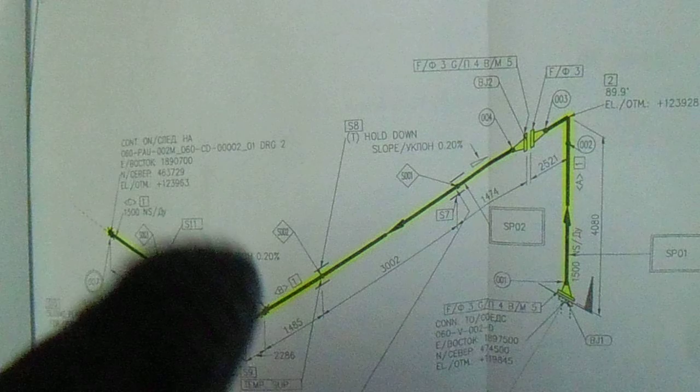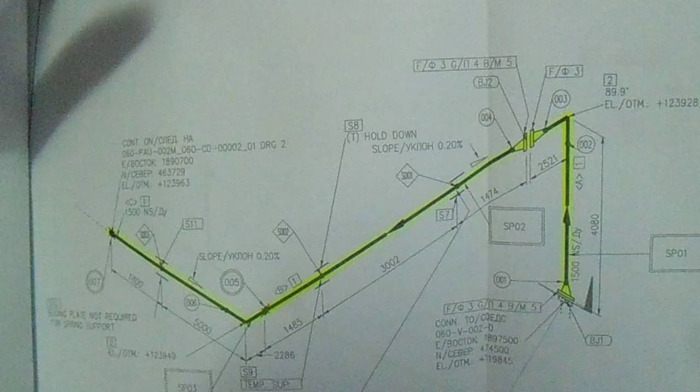So this video is regarding the test diagram legend, okay? This test diagram legend is attached in the test package. We have the isometric here, and here we will see the symbols for the test legend. So this is the test legend. So what is TM, LP, PI, FP, DP, PZV and TB? What is the meaning of all that?

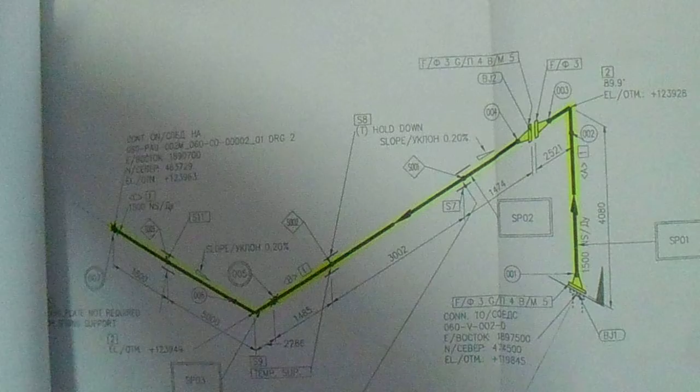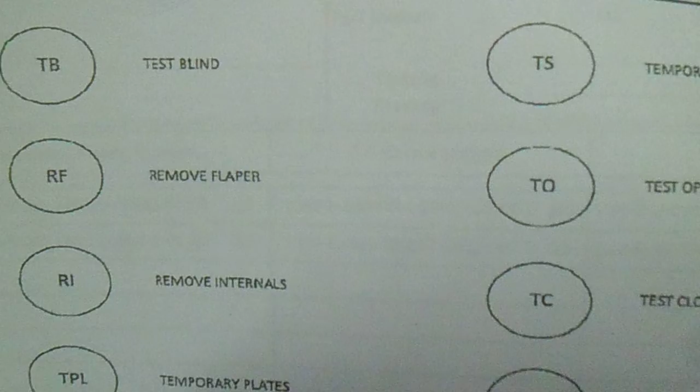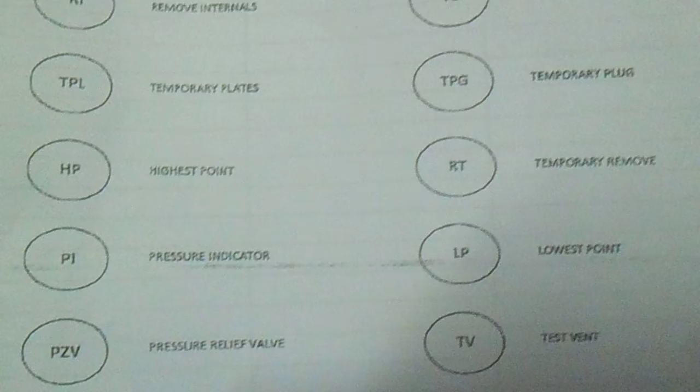So to know that, we will go to that test diagram legend. So what is LP? This is the test diagram legend. So from the isometric, they have LP, PI, FP. So what is LP? LP here is lowest point. So this is LP, meaning lowest point. So lowest point meaning they have here, from the isometric.

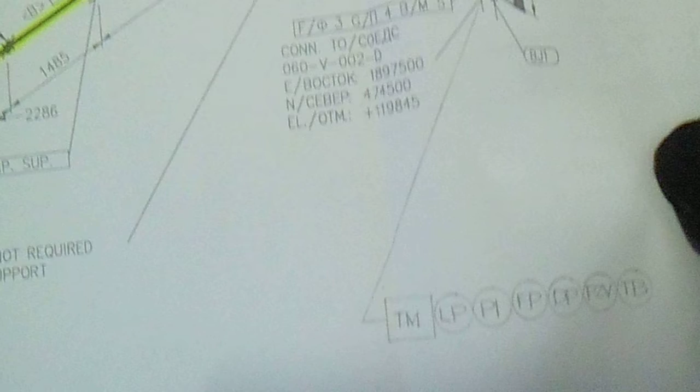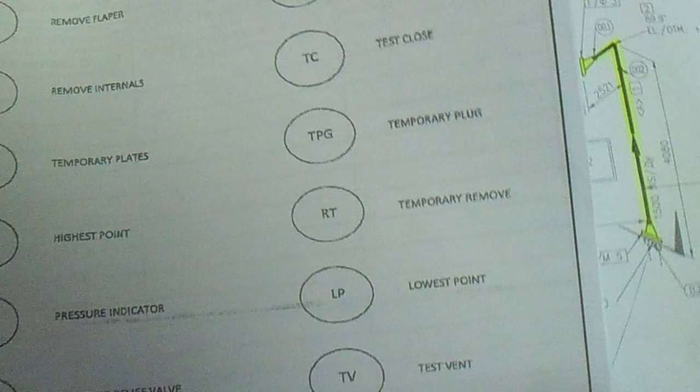Here is the test manifold, so that we have TM, because the meaning of TM is test manifold. LP is lowest point. So what is PI? PI is pressure indicator, okay? And we have FP. So what is FP? This FP is filling point, in the test manifold.

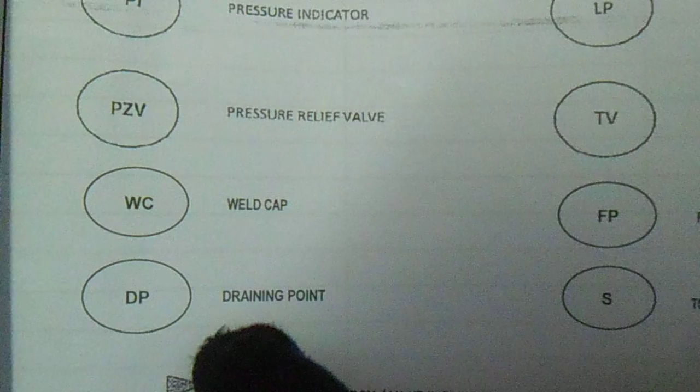So we also have DP. DP is a draining point, and PZV is pressure relief valve. And we have last, TB. TB meaning is, so this is test blind, okay?

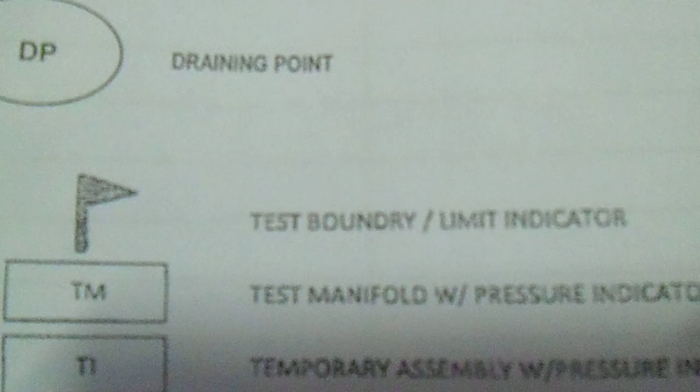And we have, you see this is a triangle, you can see also here in the test legend. So this is test boundary or the test limit. Test manifold and temporary assembly, all here in the test diagram legend.